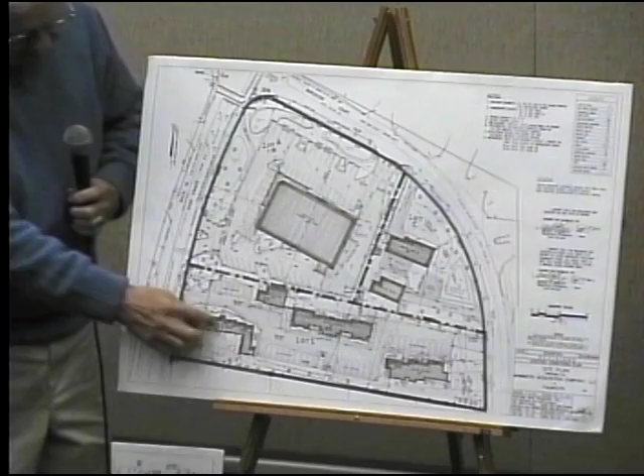There are 4 buildings on the Conway site. I think they were built in the 80s. There was an existing structure that was of some age.

Now I'd like to switch to the proposed plan. Again, this is Worcester Court, and this is Davis Straits. Again, to orient, these are colored the same way. That's the entrance to the mall, the entrance to the bank.

The proposed CVS is being proposed parallel with Route 28, so that the building is actually being turned, and it is a larger building than before. There'll be a new lot line, and this is the location of the proposed bank for the Cooperative Bank of Cape Cod.

We have prepared the site plan. The original driveway was in approximately this area, and it's being shifted in order to provide more distance between the intersection and the entrance driveway. It's still configured the same as before, which is right turn out and right turn in. There's supposed to be no left turns, consistent with what is out on the ground today.

This driveway is in the same location. This is a brand new driveway to serve the proposed bank. The bank will be served by the common driveway in this location.

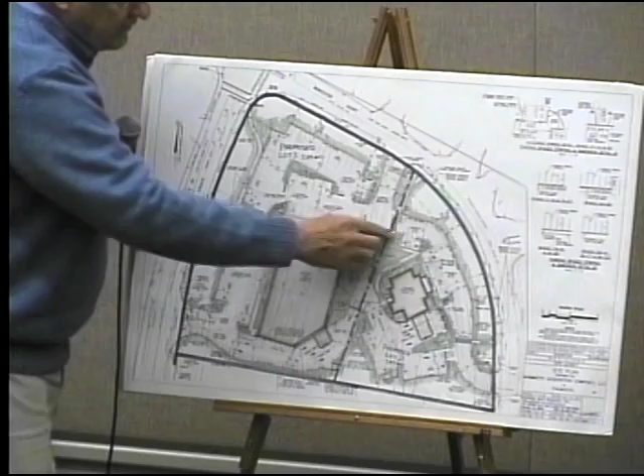So we've extended that sidewalk down this landscape island. We built another sidewalk, and then there's a pedestrian connection to the building, to the walkway in front of the CVS. Then we show the sidewalk coming all the way across. We have a painted crosswalk. We have a sidewalk that then comes in front of this building, and then it connects back out into Worcester Court. There's also another pedestrian connection here. So we've tried to pay close attention to having it be pedestrian-friendly as far as the development.

This is in an area that there is currently municipal sewer in Davis Straits, and we have shown both buildings connected to the municipal sewers. There was a comment from the DPW when we revised the plan to show that each one has its own sewer connection.

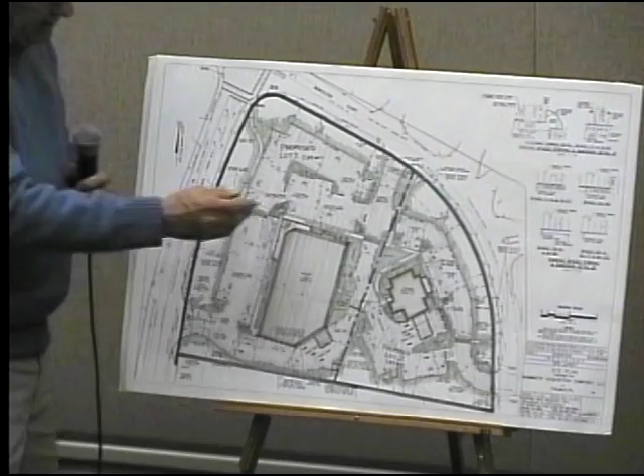As far as drainage, the site has been designed in accordance with the zoning bylaw so that all the runoff is contained on site. There is a drainage report that was filed with the planning board, and I'm just going to look quickly at the catchment areas.

There's a series of leaching structures in here that we're going to reuse. We've revised, and we'll be adding a note to our plans that these will be inspected and adjusted if necessary. There's a drainage area that comes across like this, carefully designed so that all the runoff here is put into leaching structures.

There's a small catchment area in here, and there is a surface stormwater system in this location, and there's leaching structures for the front yards of these buildings. The existing CVS is served by the same type of leaching structures, and they have operated without any problems for years.

As far as the site work is concerned, there'll have to be an approval not required that we'll submit after the special permit is issued, so that each building will be on its own lot. Each building will conform to zoning.

I submitted revised plans today because there was a meeting in Town Hall approximately a week ago to go over the design with all the different departments. So the plans that I filed, 11 by 17s, show a bike rack in this location.

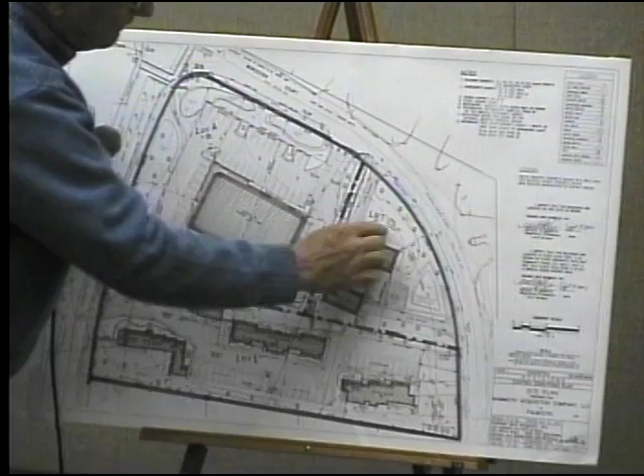In my mind, when I come back to this design, this currently, I believe, drains all out into Worcester Court, in that the grade in here is slightly above 24, and this road's at 23, so there's surface drainage in this location. There's not a lot of catch basins in this location—very few. So I look at this design of the drainage as a definite improvement compared to the existing conditions.

This site is also within the recharge area for Little Pond. So what is happening is that this is connected to the sewer, this is connected to the sewer, this is not—this is on a Title V system. So by tearing down the buildings and building two different buildings and connecting everything to the municipal sewer, I think that's a definite improvement, because we've removed a certain untreated wastewater flow from the recharge areas of Little Pond.

So I think it's appropriate next that I introduce Mr. Finuccio, who is the architect for the Cooperative Bank of Cape Cod.

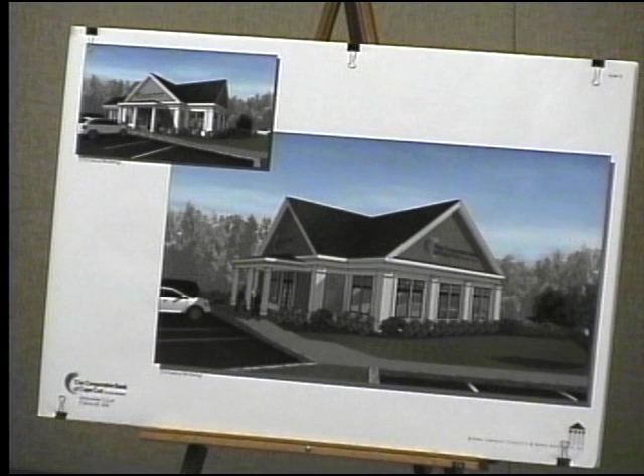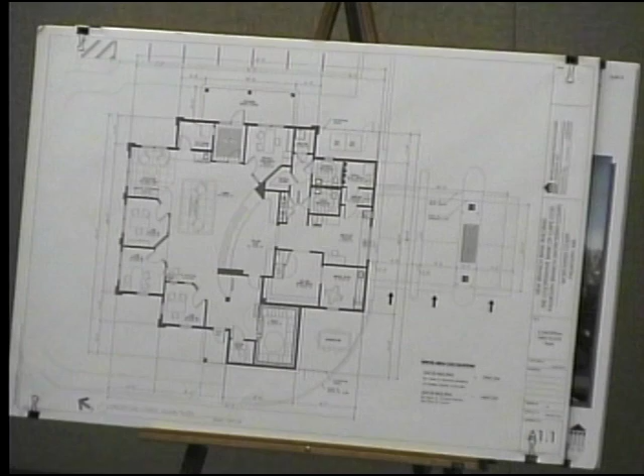And then, as I said, the floor plan is 2,952 square feet gross. We've got our covered entry, public vestibule, ATM, customer lobby, teller line, perimeter offices, and safety deposit vault. Everything behind here is essentially the back of house—teller work areas, server rooms, staff toilet rooms, and the drive-up window for the two tube lanes, plus the outside third ATM kiosk.

And that's really all I think I need at this point to get into. I'll be happy when we get to questions to answer anything related to the buildings.

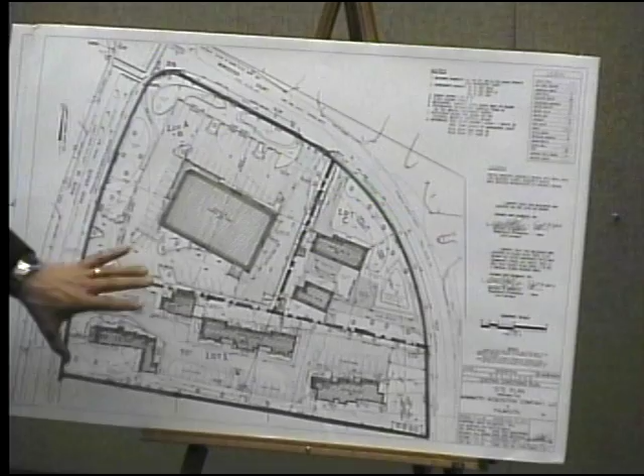The most significant improvement is the reduction in the number of curb cuts. One of the central features of the project at this location is access management, and our project embraces that strategy. If you count the driveways, there are 6 access points to this property in total. When the project's redeveloped, we'll have 3 driveways, and Mike walked you through those.

There's a significant improvement with the driveway on Route 28, as we're moving it further away from the intersection, but we'll retain the right-in, right-out configuration, because as you're familiar with this intersection, it backs up with queuing. So the important thing is no left turns, so we're not interacting with that queue, and as we relocate the driveway, traffic that comes out does so at the back of that queue. Shifting the driveway from this point down the road more than 100 feet allows us to do that - so we come out at the back of the queue, which is an improvement.

Mike mentioned we have an existing sidewalk along Route 28 as well as along Worcester Court, so we're bounded by sidewalks, and the important thing we're doing is linking and connecting in with those. Also, Route 28 is a designated bike route, so we're adding bicycle racks to the project. Our driveways, as well as the site itself with the addition of bicycle racks and the width of the drive aisles, allows for bicycle travel to connect to those facilities and have accommodations for bicycles on the site.

There is existing bus service in the area. The bus, I believe, stops at the Falmouth Mall, so with the sidewalk facilities, that also allows us to have connectivity to bus service, should our employees or anyone riding the bus want to patronize the project site. We have that integrated into the project.

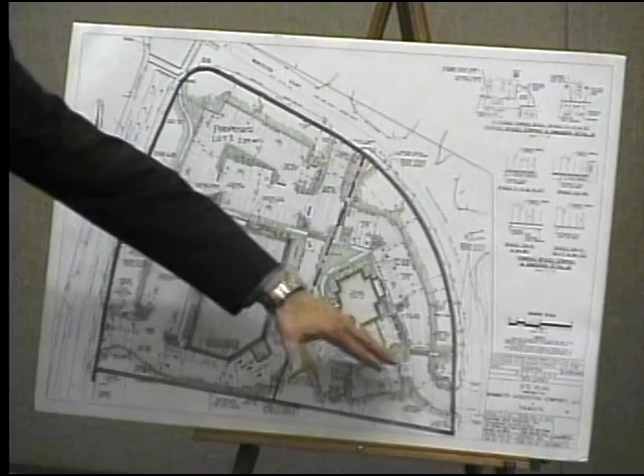The driveways themselves, as you look at the traffic study, we've laid out queuing internal to the site and at the driveways. One of the things you see in terms of the locations of the intersections within the property is that they're set back far enough from Worcester Court that, looking at the number of vehicles we expect to be stacked waiting to come out, we can actually store them internal to the site.

It increases that queue storage, so the important thing is that we can store queues within the site when there's queuing on Worcester Court from the traffic signal, and that queue doesn't get back to the point where it interferes with the ability to enter the property or circulate within it. Because when you have bottlenecks within the site, that very quickly translates out onto the roadway and causes issues with the roadway's functioning. So the site's circulation and these internal intersections have been purposely designed to be outside of those influence areas.

I think we'll hear about landscape architecture next. Thank you. Yeah, thank you. Thank you.

Good evening. I'm Dan Solien, landscape architect with Horiuchi Solien Landscape Architects in Falmouth. Our role has been to provide the landscape design for the project.

We all know as residents of Falmouth that this is one of the most prominent areas or portions of our business district. So our focus has really been to try to make this as beautiful as we can, preserving existing materials that are mature and handsome parts of the existing landscape, adding materials that screen the parking lot, preserving what we have that screens parking areas, and really planting what the civil engineers have provided as a very generous landscape opportunity within the plan.

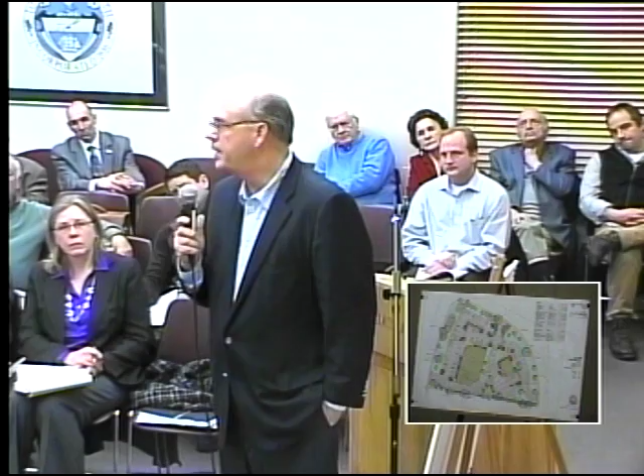It ranges in width from about 35 feet at the narrowest point here to over 60 feet at the widest. On this end, we're probably around 40 feet. So it's a substantial green space. Now, within that area, we're preserving the high-quality existing vegetation. All of the shrub massings that exist along Davis Straits and Worcester Court at the existing CVS will be preserved.

We're also preserving all of the major trees, removing only trees that are clearly in declining health. Down along Worcester Court, in the area of the bank, we're removing trees that are in decline, and also some vegetation that is more residential in nature, this being the location of a home, replacing that vegetation with trees that will grow up to provide a more substantial canopy—maple trees primarily.

Also dotting the area are some flowering trees that will provide spring color to the development, and some evergreens that will provide screening at the edges. As you move into the property from that boulevard condition, we have a generously planted parking lot with islands throughout, planted with evergreens, spring flowering shrubs, and ornamental grasses, creating a landscape with interesting effects throughout the year—just as interesting in winter as in the spring and summer months.

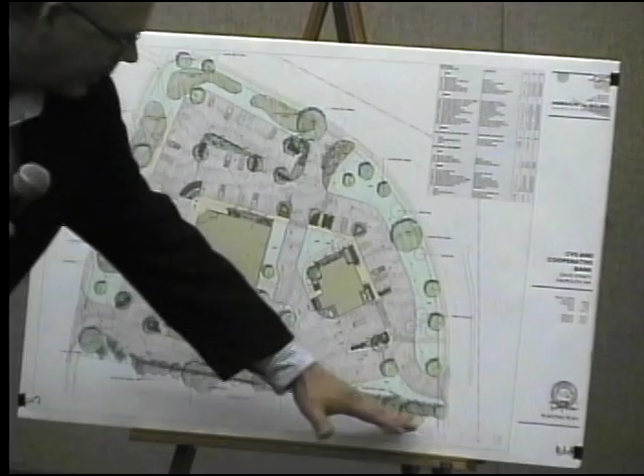Very importantly, down along the southerly edge of the property where the development abuts other properties, we've worked hard at developing a continuous screen that begins with evergreen trees at this location. Where it narrows, we have a hedge along the driveway that can grow from 8 to 12 feet over time. We have red cedars around the detention basin, flowering shrubs along the edge, and a long row of balsam fir trees to provide ample screening against the parking lot near the property line, while preserving as many existing trees along the edges as practical. So that gives you, I think, an overall summary of the landscape.

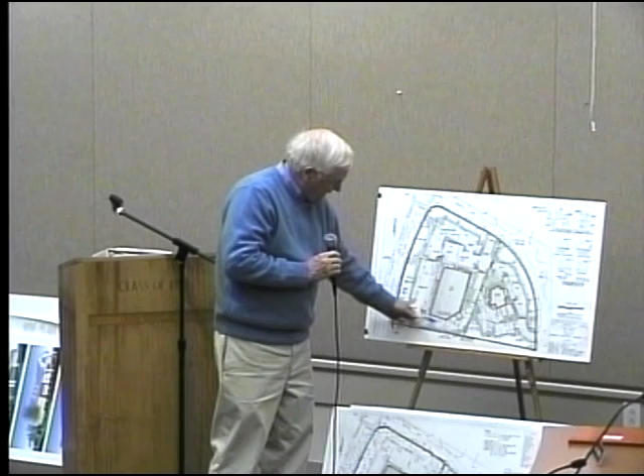There's no question that the bylaw requires us to have 3 spaces stacked here, and so there is an issue here as far as the staff is concerned concerning that loading zone, and we will revise it at some point. Mrs. Kerfoot, could I just speak to that a little bit more?

That particular area is something we've looked very carefully at in the design plans. It is an important issue for a couple of reasons. The shipping and receiving area of the store, you've got that portion of the store where you have to have the shipping and receiving at the rear of the store. Then you have the pharmacy area, which is also at the rear of the store. So we've looked at trying to adjust those 2 areas, and they really can't be adjusted because of how the store works internally, where the operations are. So you have the loading area there, and you have the compactor.

This particular configuration is used in other CVS stores. The loading is infrequent with a tractor trailer. The tractor trailers are CVS tractor trailers, not independent contractors that show up whenever they want. For this particular store, there's 2 that come in each week between the hours of 10 p.m. and 1 a.m. So the opportunity for potential conflicts with the drive-through area is extremely limited, if at all.